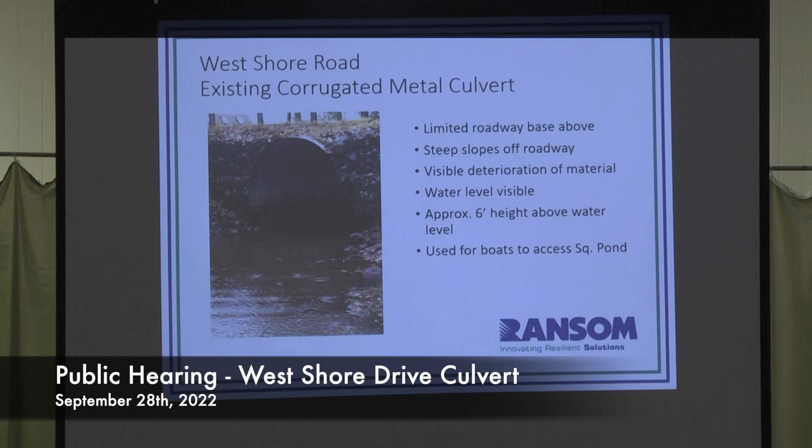Okay, so we've got an existing metal culvert over on West Shore Road. I believe you've probably all seen it. The existing culvert has got some gabion baskets to hold up that road. You've got limited roadway base above that culvert — anywhere from 2 to 2.5 feet at its highest. Not a great depth of road base over that culvert. Typically culverts want anywhere from 2.5 to 3 feet so they don't bend and buckle under pressure. We've also got some steep slopes off that roadway being managed by those gabion baskets. Gabion baskets aren't typically used as retaining walls, but they are here.

In that culvert there's some visible deterioration of the material. The surveyors couldn't get inverts because the bottom of that culvert is starting to deteriorate pretty rapidly. You can see in this picture that the highest water level is staining that culvert pretty good, so it stays fairly regular. There's approximately 6 feet of height between that water level and the top of the culvert, depending on when you measure it.

This culvert is also used for boats to access Square Pond. I'll note that the Department of Inland Fisheries and Wildlife owns the parcel directly west of this, and there's a boat ramp there that I think you're all aware of. My understanding, at least from photos, is that boat ramp has been in existence since at least 2003 and was upgraded in 2018.

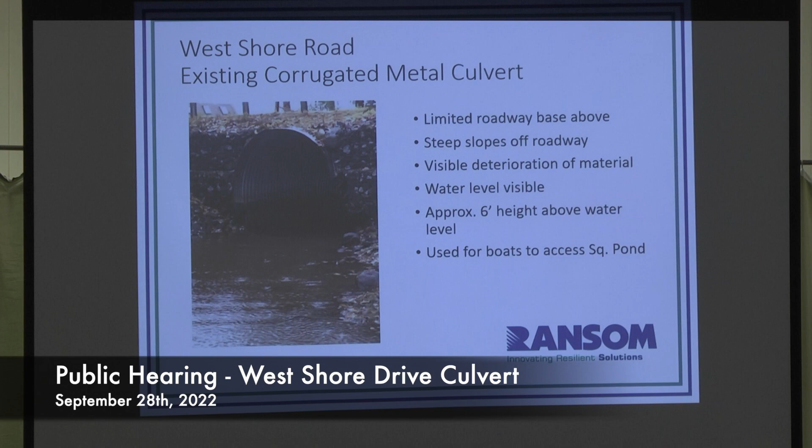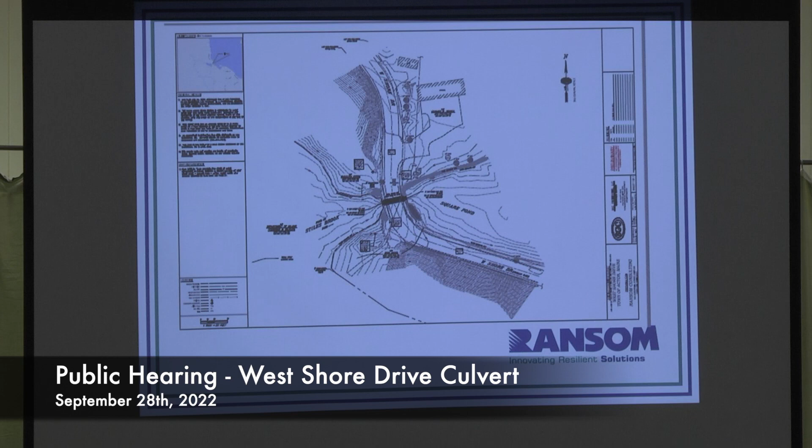A little bit closer view of it. The culvert on the survey is currently shown as 8 feet diameter. It's a little bit unclear as to whether or not it's larger than that. I had in my notes from a previous visit that it was as big as a 10-foot diameter. The inverts are rusted out, so I think the surveyor may have had some issues verifying that dimension. The dimension doesn't seem to be round either.

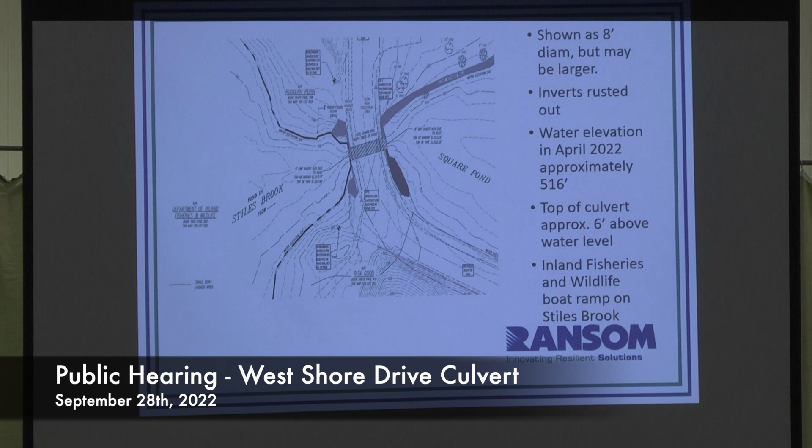The water elevation in April when they were out there was approximately at elevation 516. The highest point at the roadway where that culvert crosses is 525. So the top of the culvert, in this instance, is about 6 feet above the water level. Inland Fisheries and Wildlife has a boat ramp on Stiles Brook.

Just to go over some of the players involved in new culverts and replacement culverts: typically the United States Corps of Engineers, or USACE, regulates activities in the waters of the United States under 3 main laws. The law that applies in this case is Section 404 of the Clean Water Act of 1972, which regulates the placement of dredged or fill material into waters of the U.S., including wetlands.

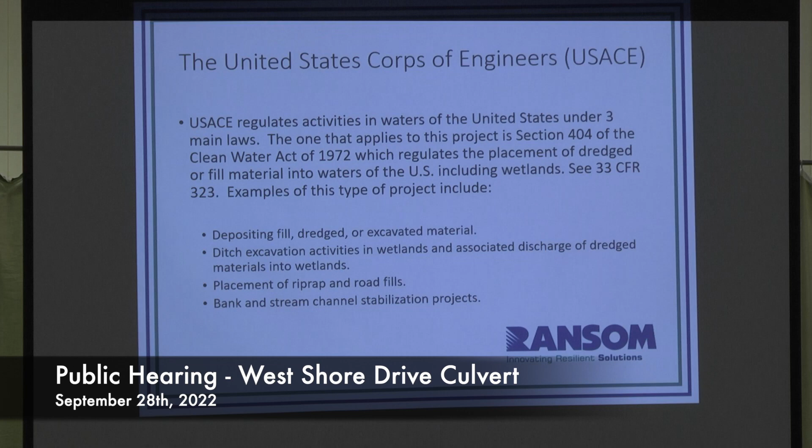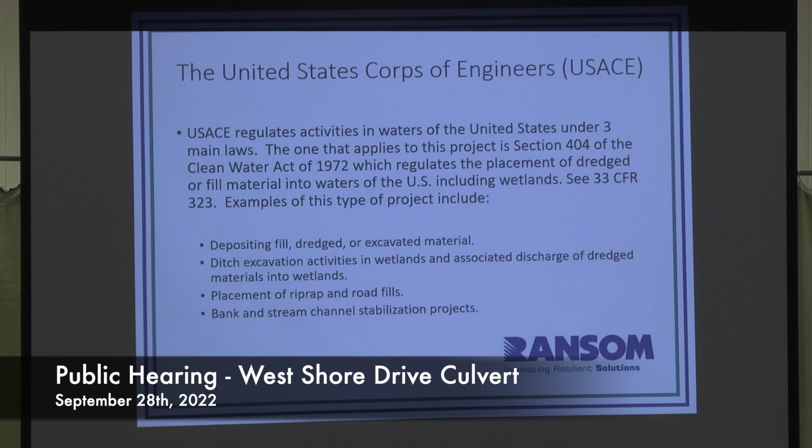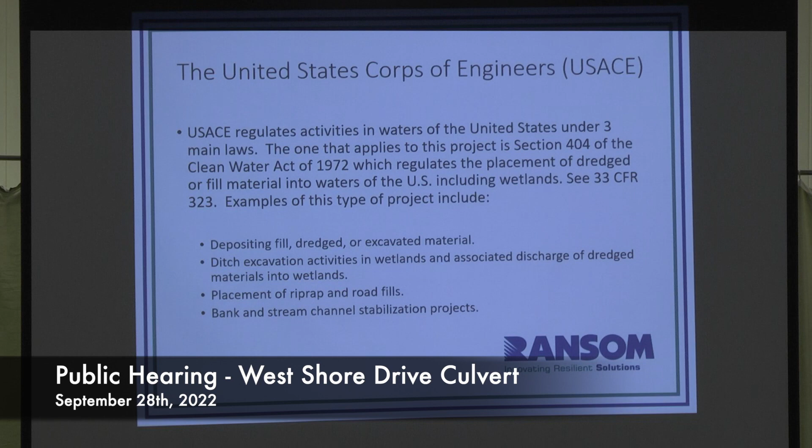I've provided the CFR, the Code of Federal Regulations, if you wanted to write that down and look it up yourself. Examples of the kinds of things regulated by this section: depositing fill, dredged or excavated material, ditch excavation activities in wetlands and associated discharge of dredged materials into wetlands, placement of riprap and road fills, and bank and stream channel stabilization projects. There are others, but I chose not to include them on this list.

In Maine, a project would require a Maine general permit from the United States Corps of Engineers. An exception to that requirement would include maintenance, including emergency reconstruction of recently damaged parts of currently serviceable structures such as dikes, dams, levees, groins, riprap, breakwaters, causeways, bridge abutments or approaches, and transportation structures. So maintenance does not include any modification that changes the character or size of the original fill design.

I think this is what folks have been referring to as the in-kind replacement. Emergency reconstruction must occur within a reasonable period of time after damage occurs in order to qualify for this exemption. This doesn't constitute an emergency reconstruction—this is the part where it's serviceable structures and includes the transportation structures.

This would require, if we were to go by the letter of the law, that the culvert has to be replaced in the same footprint as the existing culvert. What I mean by that is the impact to the fill, the area of fill—the footprint of the culvert and the gabion baskets—could not be made wider or longer either after construction or during construction.

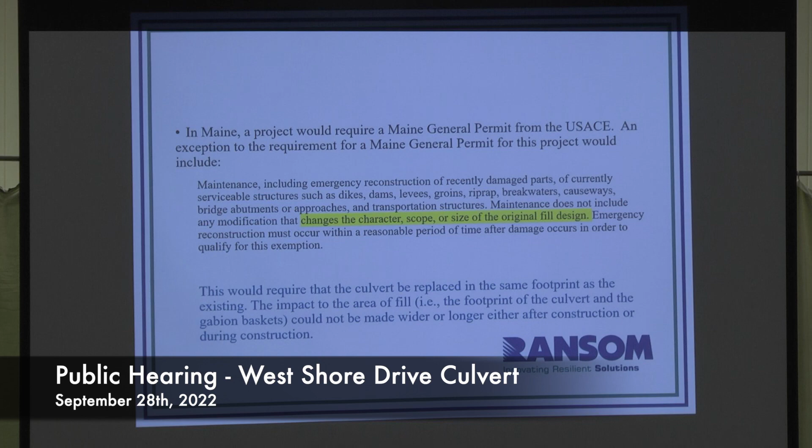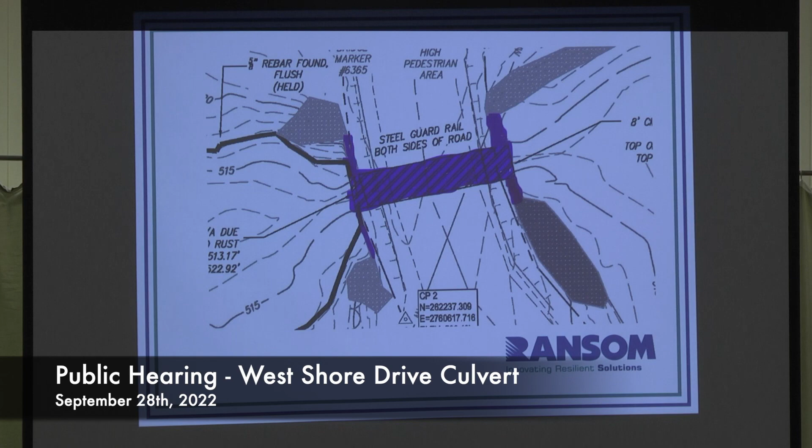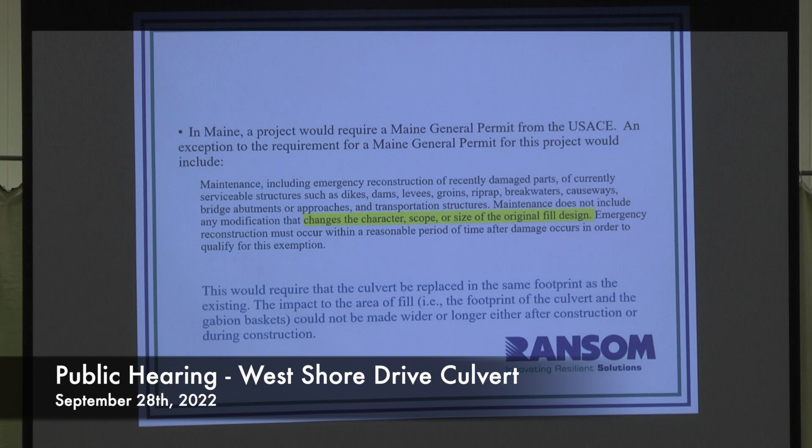And that appears out of order. All right, so these two are out of order.

But the other party involved in regulating culverts is the Maine Department of Environmental Protection. The Maine DEP administers permits for culverts under the Maine State Natural Resources Protection Act, Title 38, MRSA Part 480. If anybody wanted to write that down, you can go ahead and look it up.

Work on this culvert would be subject to an NRPA permit in compliance with Chapter 305, which is a Permit by Rule, Section 10, stream crossings.

To be eligible for a Permit by Rule, the stream crossing must be constructed in the in-stream construction window between July 15th and October 1st. Measures must be taken to prevent erosion of soil or fill material from disturbed areas into the resource by using silt fence, hay bales, stabilized slopes, and erosion prevention measures removed.

If a perennial watercourse to be crossed is used for navigation, the crossing must consist of a bridge span or pipe arch with at least 4 feet of clearance during normal high water for boat traffic. Now, we all know there is a boat crossing there, but in this particular case we have a 6-foot clearance, so the existing culvert meets the criteria for DEP.

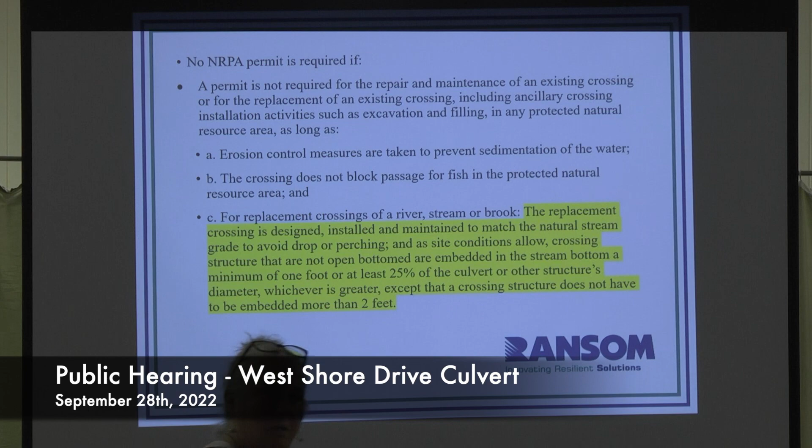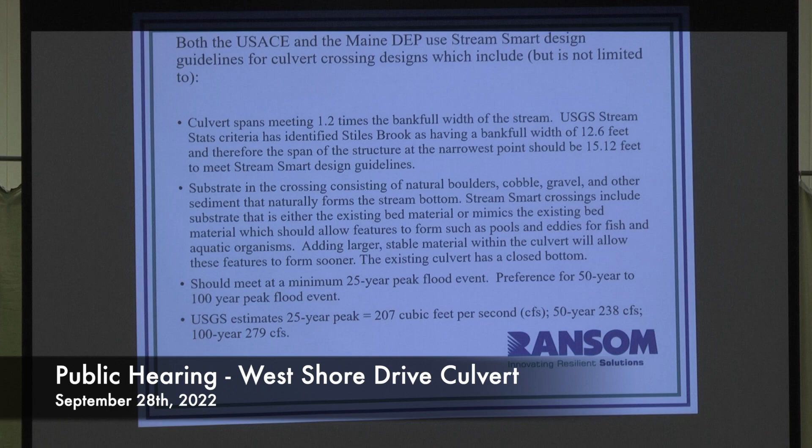Okay. Trying to get it to move. Dan? It was going good there for a while. Those are running some packets there. We got some packets also up here. It's moving here, F5, I think, okay? And then you should be able to advance, I would hope. Okay. All right. Okay.

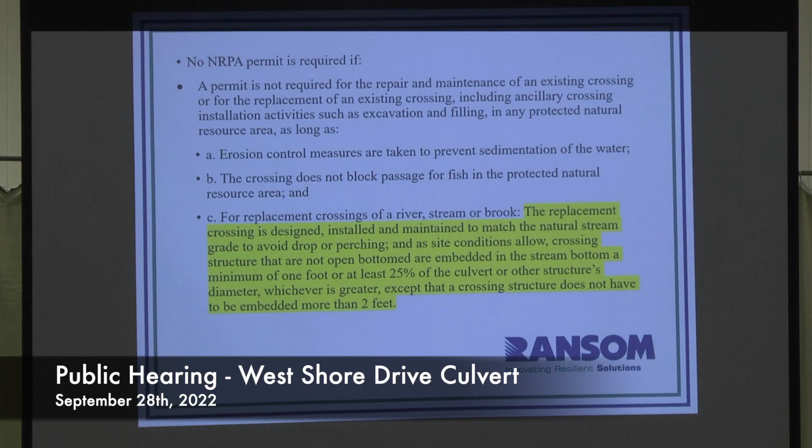So additionally, a project will be subject to a Corps of Engineers permit if there's any impact to freshwater wetlands, or if the project is constructed outside of the in-stream construction window, which I think we determined was July 15th to October 1st. So the tricky part of this is, in order to comply with the NRPA permitting requirements, the project will also require a Maine general permit from the Corps of Engineers. To avoid an NRPA permit, and also to avoid a Corps of Engineers permit, the project will need to include an open bottom or a structure embedded 2 feet.

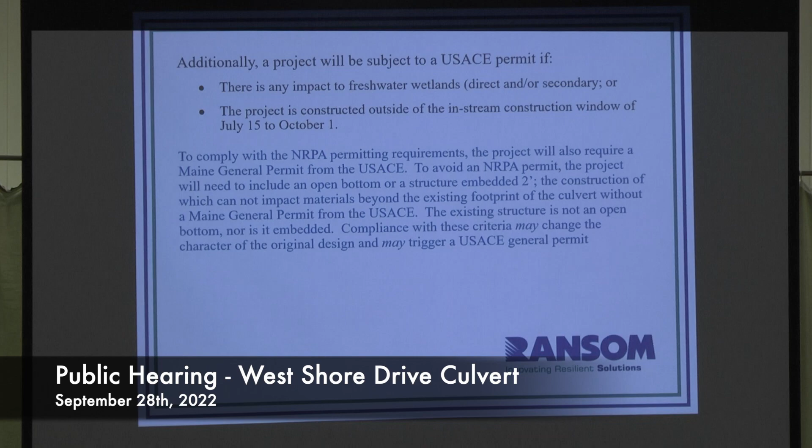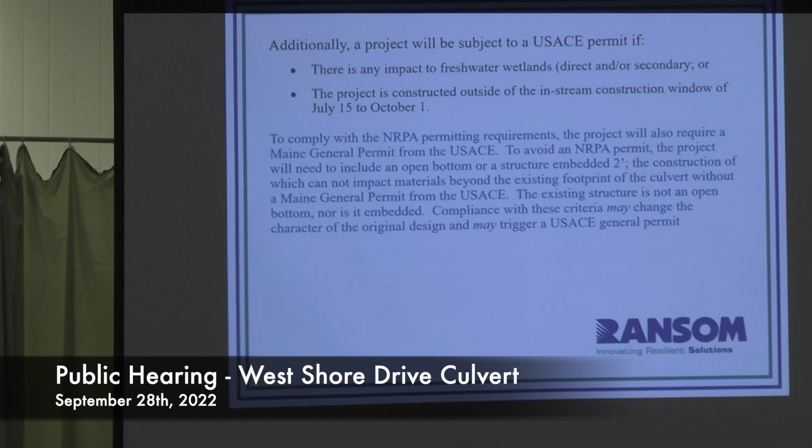The difficult part is the construction cannot impact beyond the existing footprint, or else you're into a general permit. The current existing structure is not an open bottom structure, nor is it embedded. So in order to avoid a DEP permit, you've got to have an open bottom, or it needs to be embedded. In order to avoid a Corps permit, it has to meet the criteria of the original design, and it can't change the character. So compliance with these criteria may change the character of the original design, which may trigger a Corps of Engineers permit. So the two things are not necessarily mutually exclusive, and it's going to take some conversations with both the department and with the Corps of Engineers to determine whether or not it changes the character.

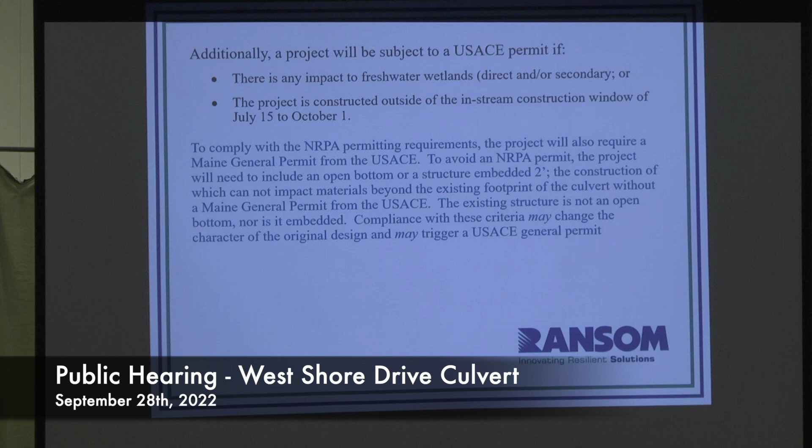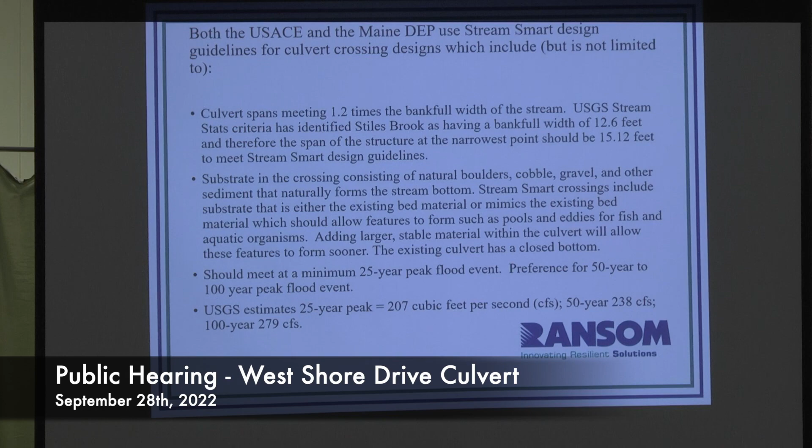Okay, so both the Corps of Engineers and the Maine DEP use Stream Smart design guidelines for culvert crossing designs, which include, but are not limited to, culvert spans meeting 1.2 times the bank full width of the stream. USGS StreamStats has identified Stiles Brook as having a bank full width of 12.6 feet, and therefore the span of the structure at the narrowest point should be 15.12 feet to meet the Stream Smart design criteria. I think there was some confusion on the drawings where we identified 1.2 times bank full width being equal to 15.12, and it was misunderstood that the bank full width was 15.12, but bank full width is 12.6.

So substrate in the crossing needs to consist of natural boulders, cobble, gravel, and other sediment that naturally forms the stream bottom. So that's what they mean by the natural bottom. And what they would like to see is a substrate that mimics the substrate downstream and upstream. Stream Smart crossings include substrate that is either the existing bed material or mimics the existing bed, which would allow features to form such as pools and eddies for fish and aquatic organisms. Adding larger stable material within the culvert will allow these features to form sooner. And I just wanted to point out that the existing culvert does currently have a closed bottom.

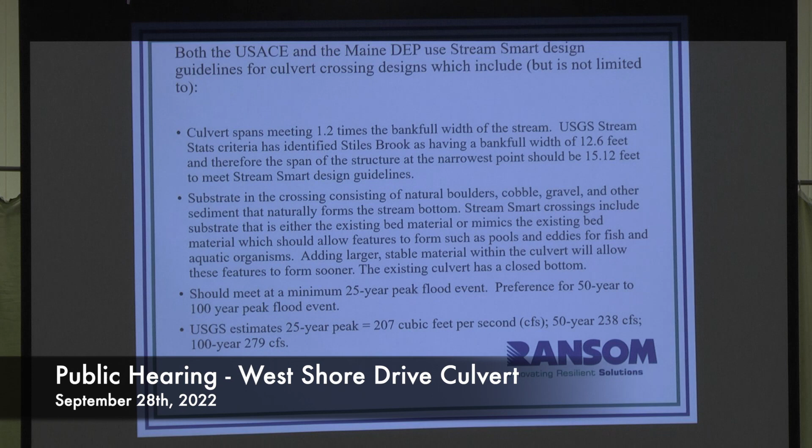The idea with the Stream Smart crossings, and part of the reason that the Corps of Engineers and the DEP are using this criteria, is because they found that a lot of the culverts that have been put in place facilitate movement of stormwater, but don't really facilitate the movement of the organisms either in the stream, around the stream, or even in some cases with the larger bridges, larger animals that use the banks of the stream to cross where a roadway would be.

And so now we are looking at what I think is a better option with the Stream Smart design guidelines. And I think Corps of Engineers and the DEP are both on board with that. So the other thing that your culvert should do is at a minimum meet a 25-year peak flood event. This existing culvert does do that. The preference in design is for 50-year to 100-year peak flood event. Maine DOT is actually pushing hard for the 100-year flood event.

And with the higher intensity storms that we have been seeing a lot more frequently, that's becoming more and more a driving criteria. So the USGS estimates for this particular stream that the 25-year peak is approximately 207 cubic feet per second. The 50-year event would be 238 cubic feet per second, and the 100-year event is 279 cubic feet per second. And that is the flow of the stream.

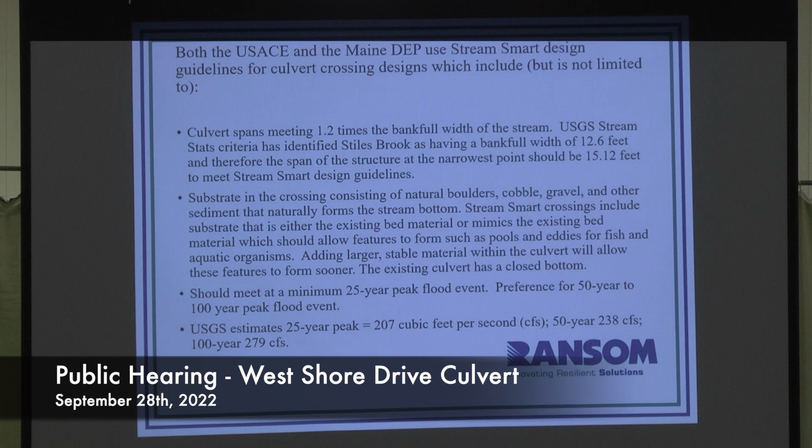Some of the other design criteria, I just want to make sure I'm in the right place here. The other design criteria that we consider is that when you're building these culverts, typically you're going to have to close the roadway. You've got about 50-plus homes beyond this culvert to the north, and they're going to require access not only for those people to get back and forth, but it's going to require access for emergency vehicles to get to those folks if ever there were an emergency.

Those emergency vehicles typically require in the order of 20 feet of width to be able to get through there. Not 20 feet of pavement, but an area that allows a 20-foot lane. The temporary access that we evaluated in this can be either via an alternate route, so a detour, or a temporary roadway constructed. So if you don't have an alternate route and you don't have a detour, then you really need to construct a temporary roadway to be able to at least get cars around that excavation while you're in construction.

My understanding is that an alternate route may be available through an adjacent property owner, and that was, sorry, Will, throwing you under the bus, that was per Will. That is not confirmed, but all of the assumptions are that there's an opportunity to have an adjacent property owner provide the alternate route. Now, again, if that doesn't happen, then you need temporary roadway construction. So if that alternate route is not available and you need the temporary construction of the roadway, that would absolutely require the Corps of Engineers and DEP permit.

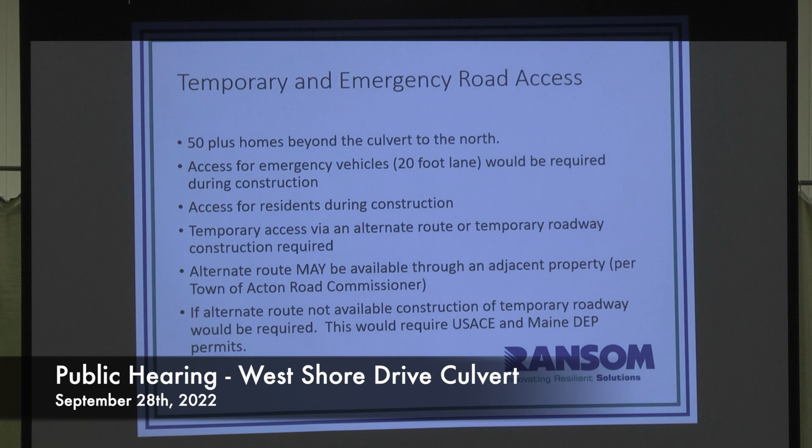So the option one, which is the in-kind with no permits. As I kind of alluded to, that design might not actually be feasible without getting the permits. You're really going to be threading the needle in order to be able to design it without getting permits. If we can design it without needing permits, the construction can't go beyond the existing footprint. I would recommend to keep the roadway in place and to not accidentally over-excavate, using sheet pile to keep that back. It's not required, but if you over-excavate, you need a permit.

The head walls, based on the criteria about the change of character, may be required to be Gabion baskets. I would push that we don't use Gabion baskets in hopes that we could review an alternate that might still meet that criteria for the character and still be able to hold your road up. If, in this instance, you needed to provide a temporary fish passage, wow, that is really a lot harder to say than I thought it would be.

Typically when I do these culverts, we have a permit, but we let the stream continue to go through, either by keeping the existing culvert in place and working around it, or providing temporary passage through another culvert, a little bit adjacent to it, just out of the construction zone, so that we can keep that stream flowing temporarily.

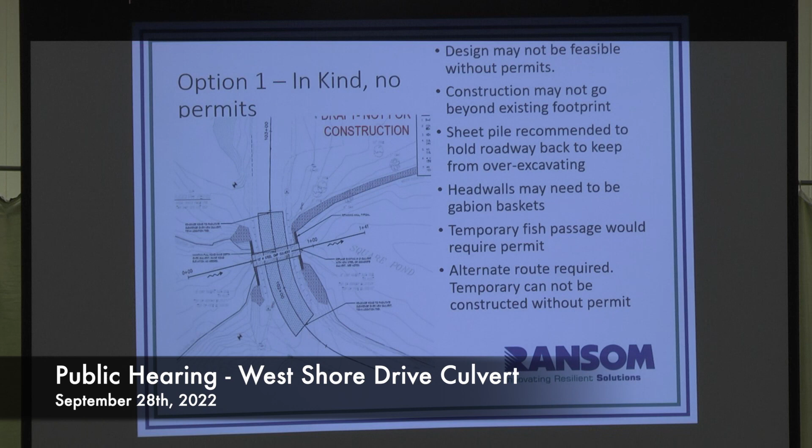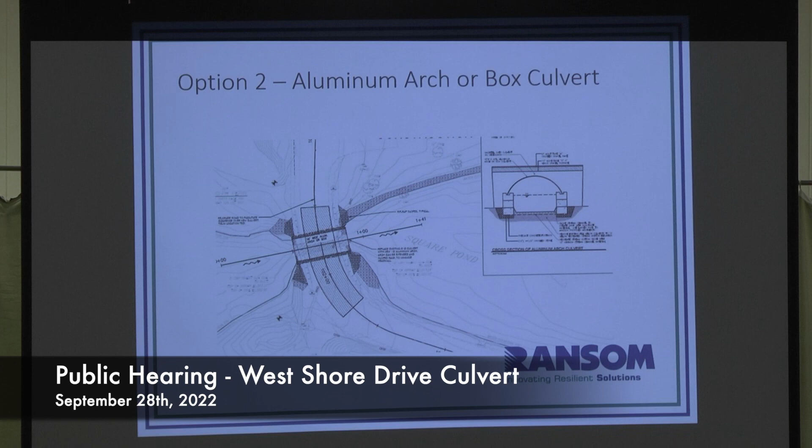Option 2 is the aluminum arch or a box culvert. So in the drawings that we presented, we looked at the aluminum arch, which is probably the more restrictive of these two options. You could potentially use an aluminum box culvert, which is a little bit squarer, rounded at the corners, not quite as arched. But in this case, and in all cases, you'd still need to have 8 feet above the water line for the boating access.

Inland Fisheries and Wildlife recommends 8 feet for safe boating. You currently have 6. An aluminum culvert would require cover over the pipe to be approximately 3 feet. I think I alluded to that before. So currently there's anywhere in the neighborhood of 2 to 3 feet. The 8-foot safe boating requirement would require the road to be raised approximately 2 to 3 feet.

Raising the road would require roadway improvements to minimize slope differences and could impact abutting properties. I say could, but I think they will. The question on that would really be to what extent, and we haven't evaluated roadway reconstruction and the extent of the roadway reconstruction. I limited it here to there would be roadway improvements required.

An alternate route during the construction would be preferred, but it is not necessary, as a temporary roadway can be constructed with this option, and it would allow traffic to go around. You can construct this option in pieces so that you can have traffic go around the culvert, and then you could be installing half of the culvert on one side, and then when you got ready to install the other half, you'd have to switch the roadway over. Not ideal, which is why I would suggest an alternate route.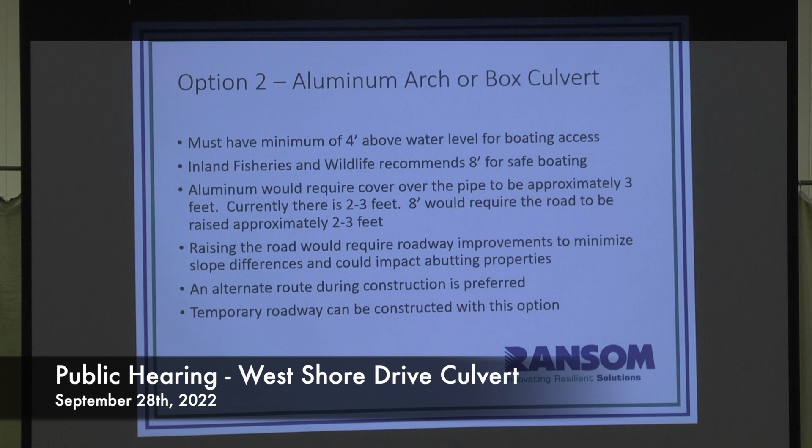Additionally, you could make the temporary roadway be two-way traffic and much wider. It's a lot of work. Option 3 is very similar. It's a concrete box or block. You could use a 3-sided concrete box to establish that open stream bottom, or you could use a block structure. I've used the blocks in a couple of different locations.

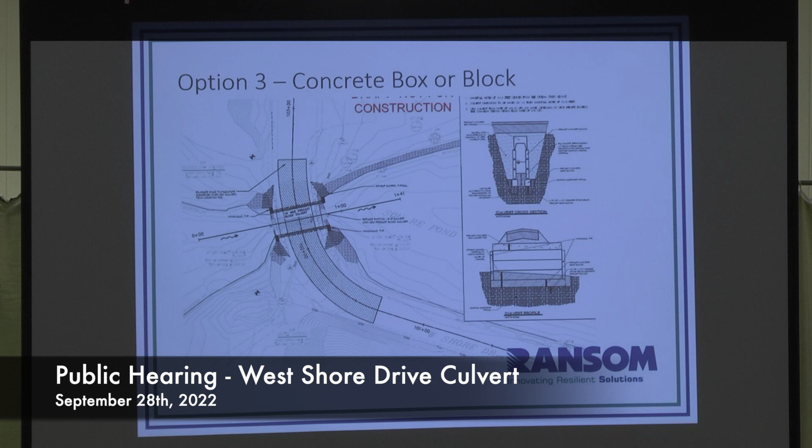The advantage of the block is that you can be constructing it in pieces and be backfilling as you go, and it allows you to open up the stream a little bit quicker. It's also cheaper, but we can get to that. Concrete box or block, similar to option 2, also must have 4 feet above the water level for the boating access. Inland Fisheries and Wildlife obviously still recommend the 8-foot for safe boating.

The concrete decking can allow you to reduce the cover over the pipe. So currently, like I said, there's about 2 to 3 feet. The 8-foot would require the road to be raised closer to 2 feet than the 3. But I think you're still going to want to have some road base above the culvert and underneath your pavement. Similar to option 2, raising the road would require roadway improvements to minimize slope differences and could impact abutting properties. Alternate route, also preferred. Temporary roadway is also an option.

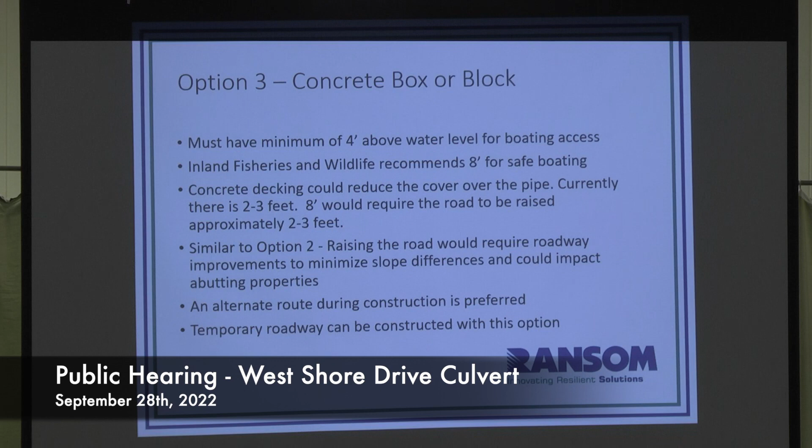Construction costs. So some of the things that we looked at with our construction costs, and I want to caution you that these are all preliminary and that they are based on the concept designs, not the final designs. So there will likely be additional cost for roadway improvements, in whatever form they take.

And I want to also kind of stress that even with alternate one and that option one, we don't have enough cover going over the roadway as it exists, so you are still going to need to bring that road up. It may not be 2 to 3 feet because you're not increasing that height over the culvert or over the water by an additional 2 feet, but it's still going to have to be raised, and you're still going to have some impacts, just not the same extent.

So we also don't include any improvements to that alternate access. In the event that alternate access isn't a road that's currently graded or wide enough, we haven't included any additional costs to improve that access road. We haven't included any costs for temporary roadway. We're really banking on your abutters to allow temporary access through a property.

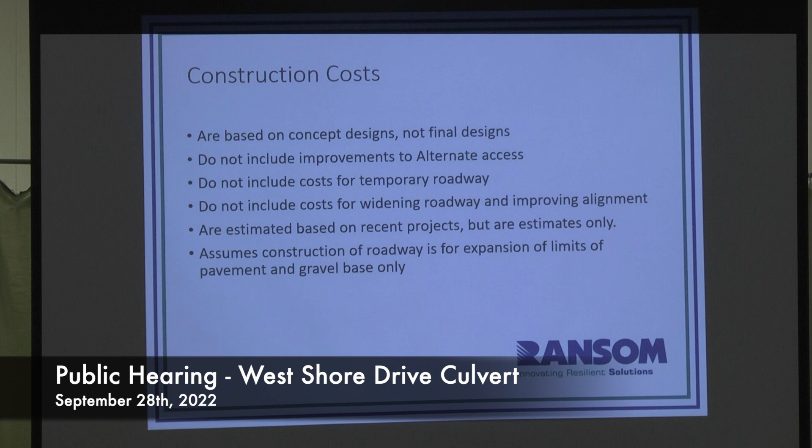The construction costs for options 2 and 3, I think, are going to be fairly similar. If you're shutting that road down, there are ways to construct it by putting in foundation blocks and building up. From what I've seen comparing the aluminum arch, the aluminum box, and the concrete block, the time it takes for construction is pretty similar. The area involved is pretty similar, and the construction costs themselves have been pretty similar.

The difference between those options is the cost of materials. Over the last couple of years we've seen fluctuation in material costs. Last year, in 2021, the aluminum culverts were cheaper for materials than the box culverts or block culverts. Three years before that, the block culverts were the cheaper option. Both are good options—I'm a little partial to the block, but I've put in both, and it really depends on the cost.

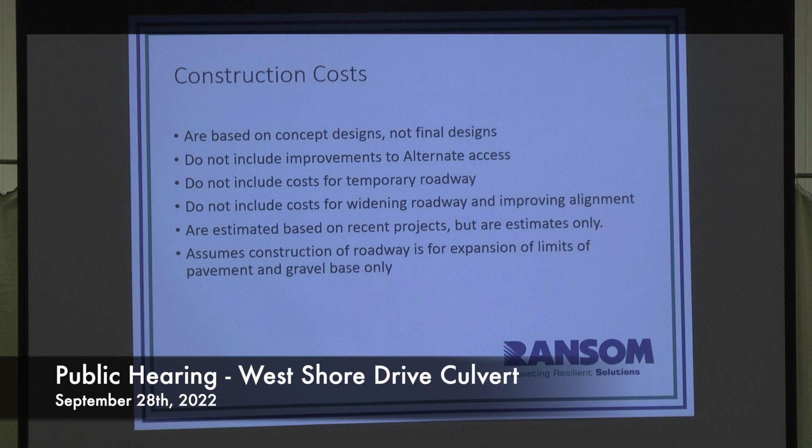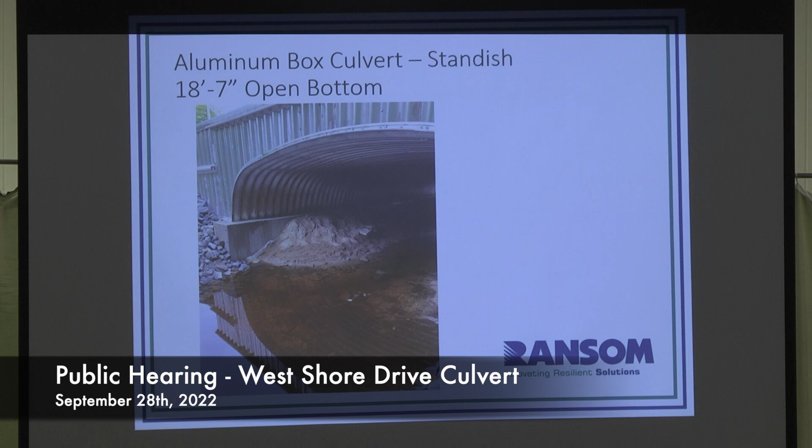So just to show a few of the options we're talking about and what these things actually look like: this is an aluminum box culvert recently constructed in Standish, shown here during construction. It has an 18-foot, 7-inch open bottom, and in this case the rise of the box itself is about 5 foot 4 inches, with a 3-foot block on the bottom.

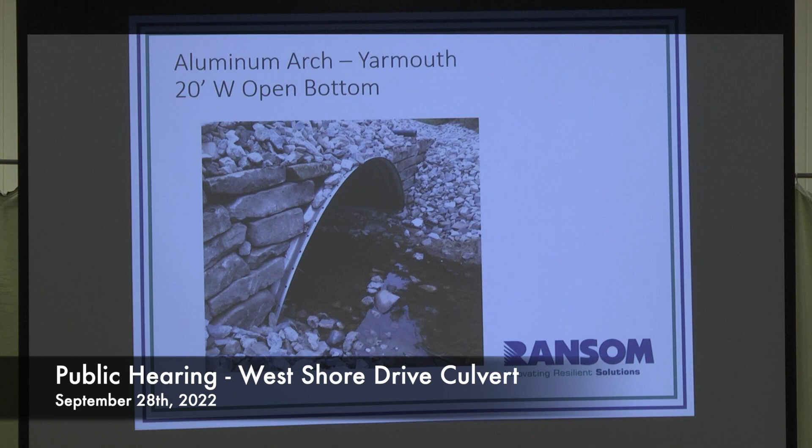This is an aluminum arch that was installed in Yarmouth around 2018. Believe it or not, that's 20 feet wide at the bottom, but it's only got a 3 foot 4 inch rise.

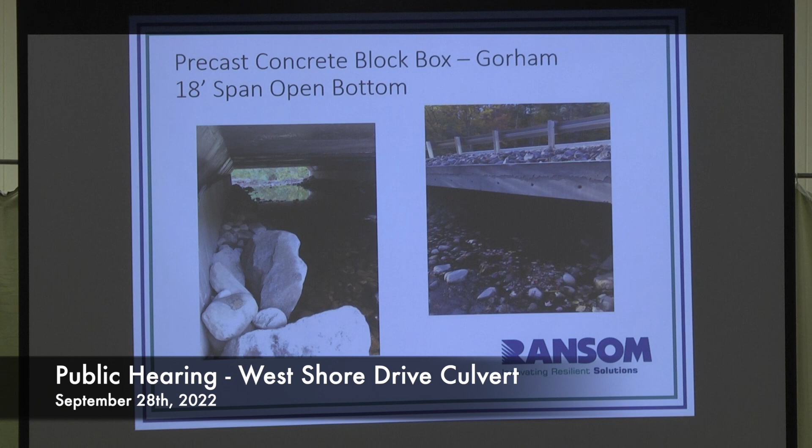This is a precast concrete block box in Gorham. It's an 18-foot span. The way those spans are constructed, the decking is 4 to 5 feet wide, and they're put down in series and pulled together. The blocks are very much like a Redi-Rock retaining wall, where they fit together and alternate so you're not just building straight up. So they tend to be easy to install and fairly easy to move around the site as well.

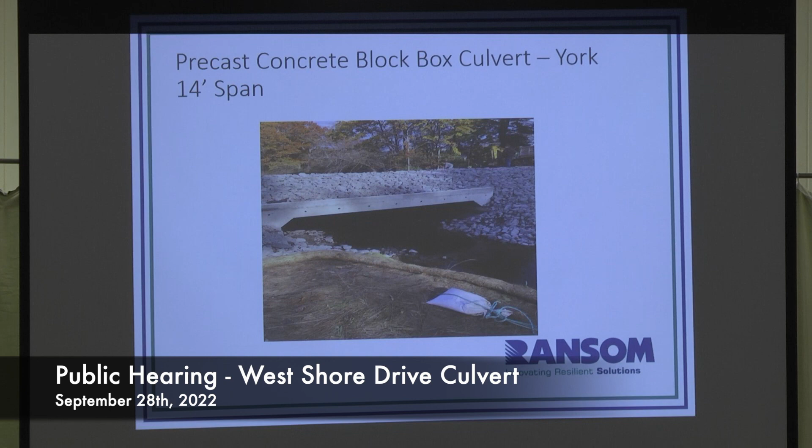Same type of block used in York. York has also, this past year, put in another 2 culverts using this same style. Cost of the blocks was more expensive this year than aluminum, but York opted to use this option because they were installing it with town DPW staff rather than having a contractor do it. They felt it was easier to just stack the block, so the cost of construction wasn't the same with this option.

They saved it by using their own forces. And that is primarily it. I know there's a ton of questions that we need to get to, so I figure I'll let you at them.

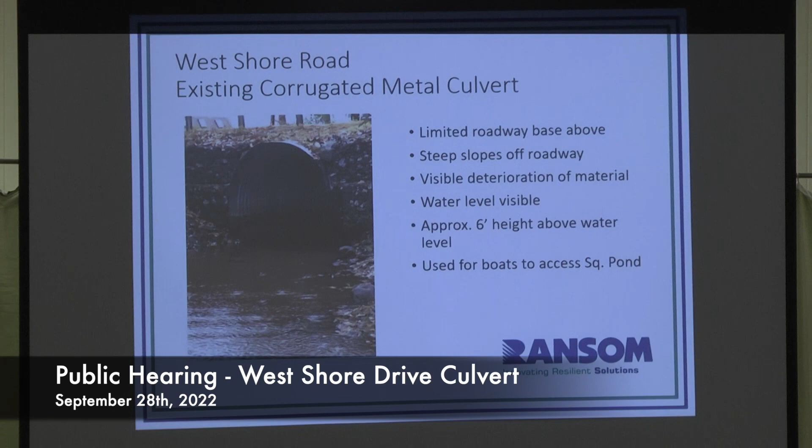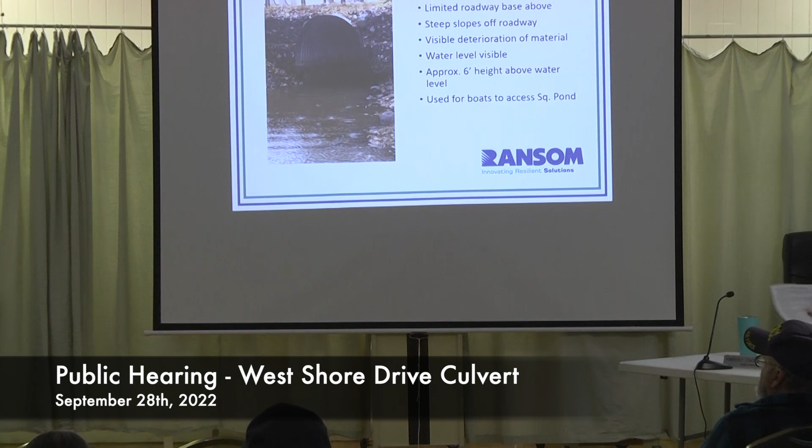That's what I was just going to say. Do you have a list of the questions? I do have a list of the questions, and I know that Jen went through the trouble of reorganizing them so that they would be easier to deal with. So we're going to let you go through the questions and answer what you can, and we'll go from there. Okay.

All right, so question 1. This was, I think, the first group submitted by the Square Pond Association, so I'll handle all the Square Pond questions first, and I'll let you know when I'm switching over to the next. Square Pond has 28 of them. You guys are busy.

So what is the estimated total cost to the taxpayers of Ransom's option 3, including the actual construction, road reconstruction for some distance on both sides, widening the road, easement area, reinstalling guardrails, and purchasing additional easement areas from residents along the expanded width roadway? That is a bit of an open-ended question because what I've looked at is comparable costs for culverts of that size. If there is additional work to the roadway, additional roadway improvements, I haven't factored any of that in. That would have to be better determined at the final design.